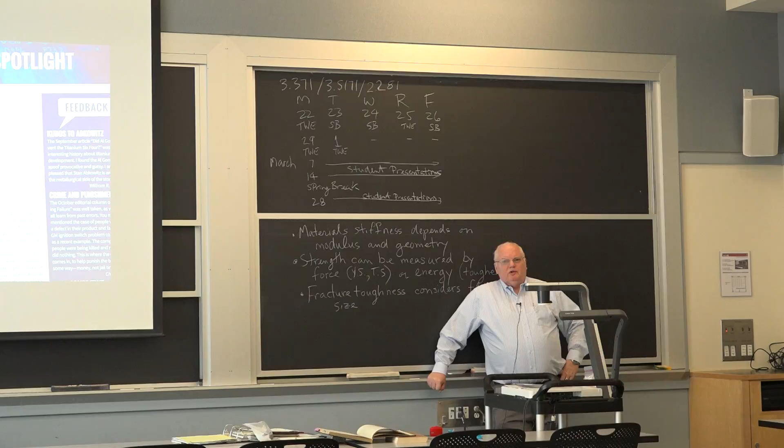Is there a particular time or date you want to exclude? We're going to have the room from 8 o'clock in the morning till 11. I'd be willing to start at 8, but I don't think most students are. I think some students might be willing to start at 8:30 - the 3 of you come early, right? Or the 4 of you, including Paola.

Not that we have to do that, but there are 46 presentations, and if we're going to finish them, we've got about 3 weeks. I want to try to finish them over the 4-week period that includes spring break, so we've got 3 weeks. If we have to, we can go later, but your other classes are going to start getting busy, and some undergraduates have said they want to avoid the week before spring break because that's when other classes have their midterms.

A third of the class are graduate students, and I've got to do some traveling in between here. For example, the 8th, I have to be in South Carolina, I think. I'll find out later today. But anyway.

And then for the one-page summaries of each module, when are those due? Before I have to turn in grades, which is mid-March or mid-May. Actually, the last day of class, which is like May 10th, 11th, or 12th. Can we just email them to you? Yeah, that's fine. So it's okay if we do those after spring break? Oh yeah, I don't have to turn in grades right away. The registrar doesn't know that I accelerate the class.

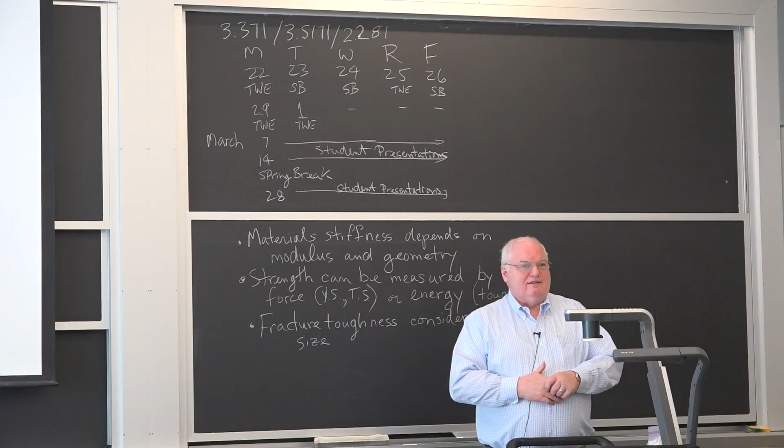To me, it's just as easy to get it done. In fact, the problem I have is if I don't get something off my desk within a week, the odds are I'll continue to say it doesn't need to be done, and it'll never get done - everything else will come in ahead of it. Everybody has their own weakness in how they schedule, and we're all overcommitted. I used to say half of what we do are things we don't really need to do. The problem is knowing which half we don't need to do - I haven't figured that out.

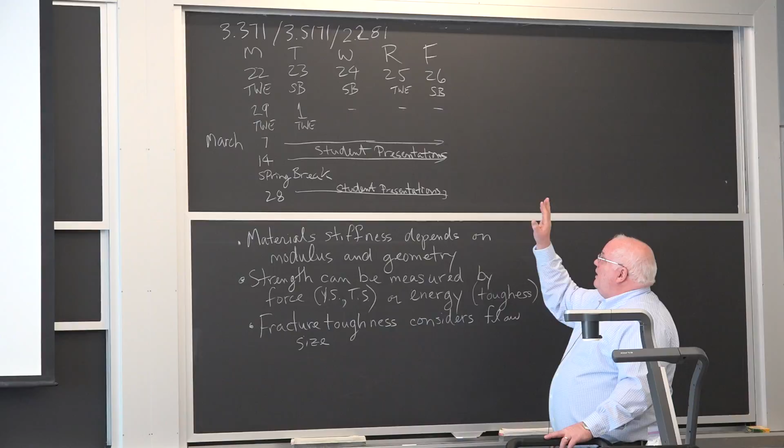Okay, since we've got most of the people here - I'll be lecturing today and Thursday. Dr. Belmar will be in the other 3 days this week. He will finish up his module of 8 lectures this week.

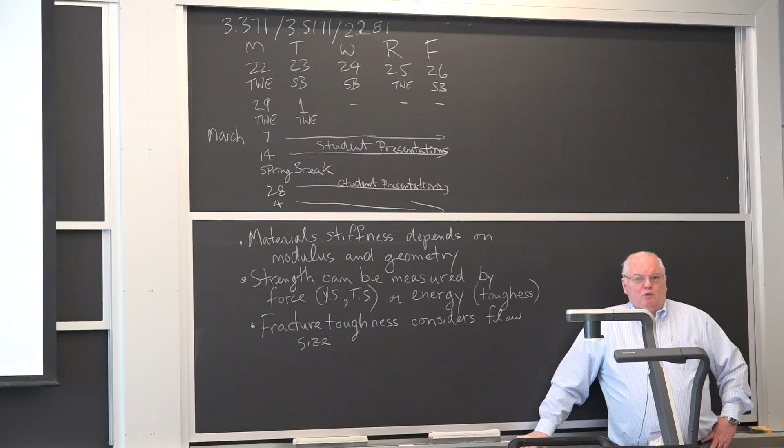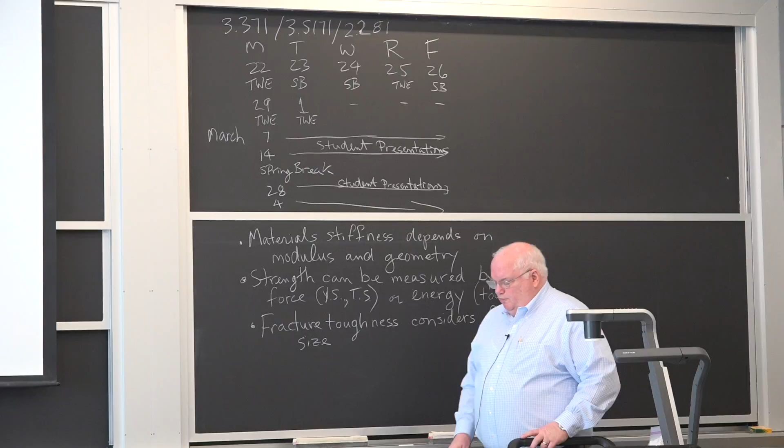Any questions? I did have one little thing I happened to see in a materials journal. I mentioned rare earths, and they said demand's going to reach $4.5 billion by 2019, and it gave a breakdown of where world rare earth demand comes from, talking about 2010 and 2012.

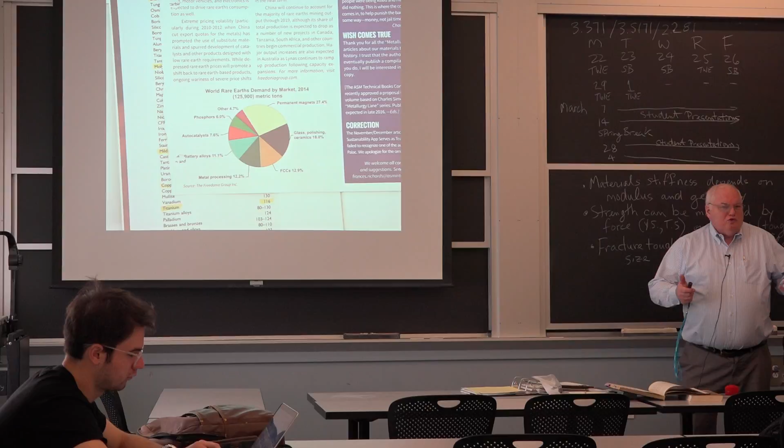China basically decided to cut their export quotas, which meant they refused to sell to Japan. That's a euphemism for political warfare against Japan. So that's one of the externalities.

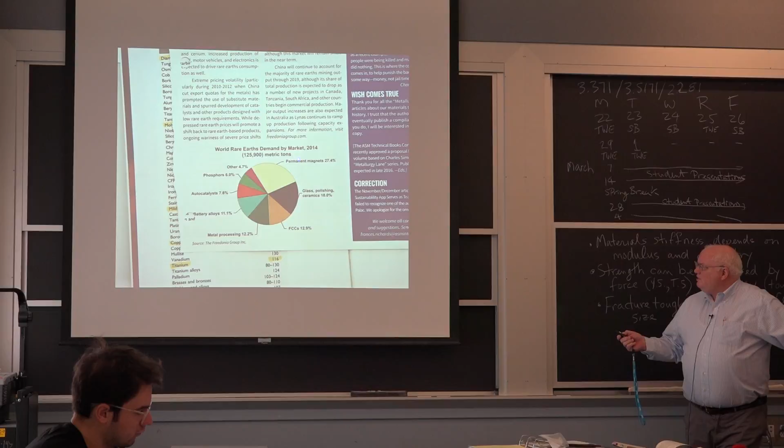125,000 metric tons in 2014 across lots of different areas. Permanent magnets being the largest, a little over a quarter. Polishing of glass and ceramics - it turns out a lot of the rare earth oxides are very hard and make good polishing media. They're not really rare, I think I mentioned that. We call them rare earths, but they're not really rare in the Earth's crust necessarily.

Metal processing turns out to be 12%. People use cerium in steel to tie up the sulfur, and there's 1 billion tons of steel, so it doesn't take very much cerium in steel to end up being a fairly large fraction of the total.

Catalysts, phosphors, a number of uses. Battery alloys - I don't even know what FCCs are.

But to give you an idea, 125,000 metric tons compared to steel, which is 1 billion metric tons - we're talking orders and orders of magnitude larger. And we're talking about a world market of $4.5 billion. What's the market for steel, roughly? It's $750 billion. So $4.5 billion is a drop in the bucket in terms of the size of the industry.

If you were to do the same thing with titanium, we all think of titanium as essential, and it is essential to our aerospace and space sectors. But titanium cannot even afford to have their own rolling mill. Essentially Timet, the world's largest titanium producer, rents one day a month on a steel mill to roll titanium. So they can produce most of the world's titanium on one steel mill, one day a month.

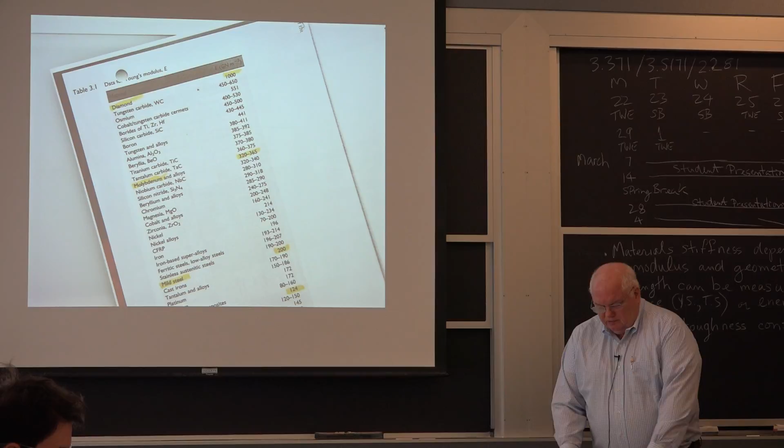You have to understand the difference in magnitude of these things, which is one reason I put it up. We talked about diamond having the highest modulus - in gigapascals, it's 1,000 gigapascals. Tungsten carbide is 450 to 650, depending on how it's put together.

Tungsten in its alloys as an element is 380 to 411, so about 400. Molybdenum is almost as high. Mild steel is way down at 200, one-fifth of diamond, but still pretty high compared to all the other things.

Titanium is only 116, and aluminum is 69 - only 7% of that of diamond. Copper is 124, about the same as titanium. Copper, interestingly, is very crystallographic orientation dependent in terms of modulus.

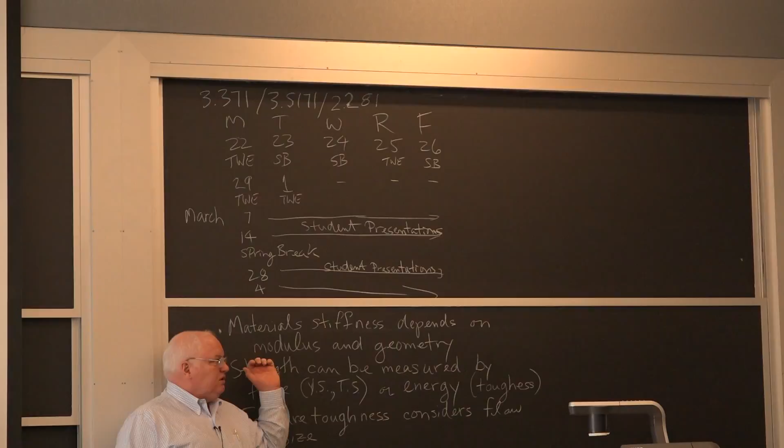One of the things we talked about before was material stiffness. It depends on both the modulus, which is a chemical bonding property of a material, the strength of the chemical bond, and the geometry. We talked about Timoshenko's book on the history of the strength of materials.

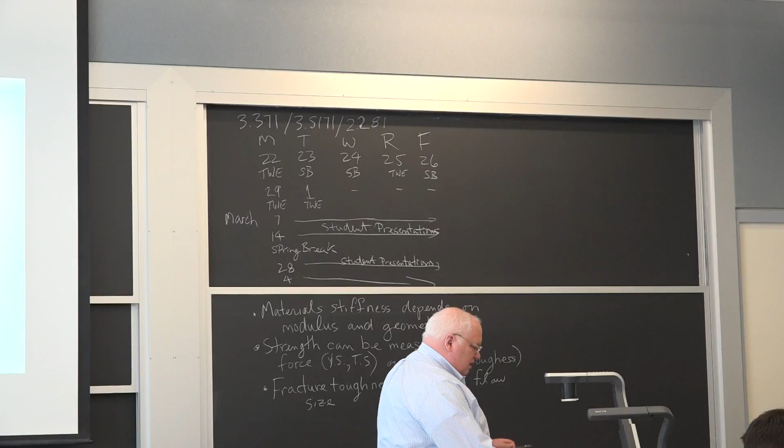Here's good old Timoshenko's text from 1950, and I showed you his picture of Galileo measuring the strength of a beam. This is from one of Galileo's illustrated books. There's a beam, and he hangs a weight on it, and Galileo started to figure out something about the strength of a material.

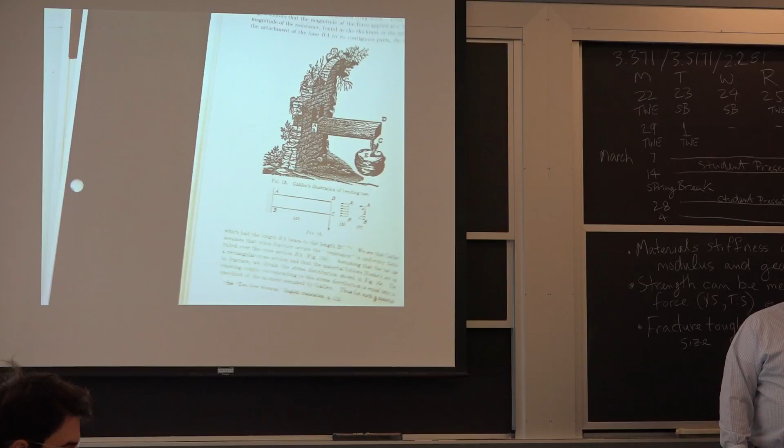There was Hooke's law in the 1660s, which basically said stress was proportional to strain. But this is Hooke right here. Hooke had some drawings from some of his papers trying to figure out the modulus of a material.

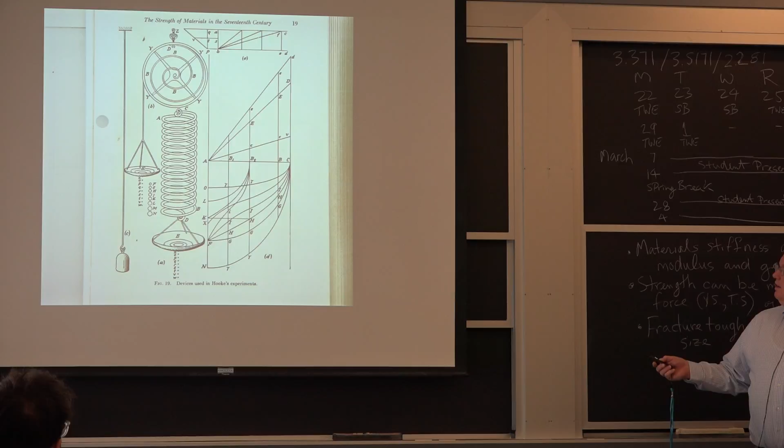In one case, he just took a wire and hung a weight from it. In another case, he took a balance and could weigh something and measure how much it was stretched. In another case, here's geometry: he took the same type of wire and made it into a coil, and you get a lot more deflection. But if you go through the mathematics, it turns out...

Does anyone know what type of stress is on a spring when you extend the spring? It's not a tensile stress. Turns out it's a shear stress, and it's equivalent—if you had straightened the whole thing out—to a twist. So springs actually fail in torsion, even though they're operated in tension, but they're circular, so the stress axis changes.

But anyway, so these are the types of things. Hooke's sitting here trying to figure out the difference between these two things, the material property and the geometric property. It wasn't obvious in the 1650s that there were these two things that changed the stiffness of a material. But it was pretty important whether you were designing cathedrals and big buildings like that or whatever.

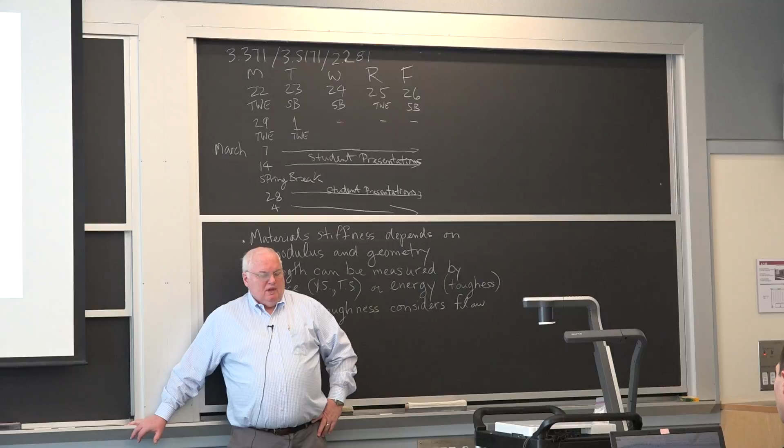We had railroad bridges. The big industry, just like the automotive industry is huge today, the huge transportation industry, aside from whaling and ships, in the 1800s was railroads. And in fact, Andrew Carnegie became the richest man in the world, richer than Bill Gates is today on a constant dollar volume, by selling steel to the railroads. Just like Bill Gates sells software to the computer makers.

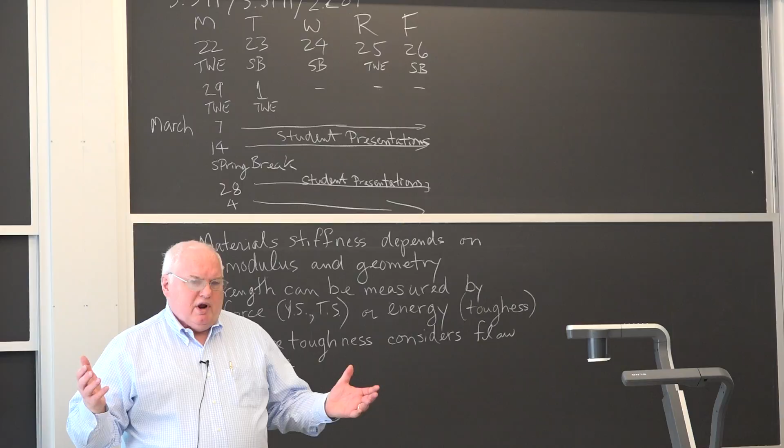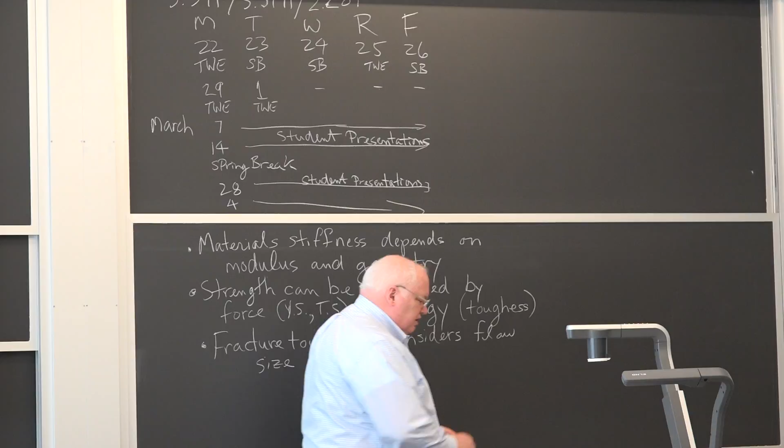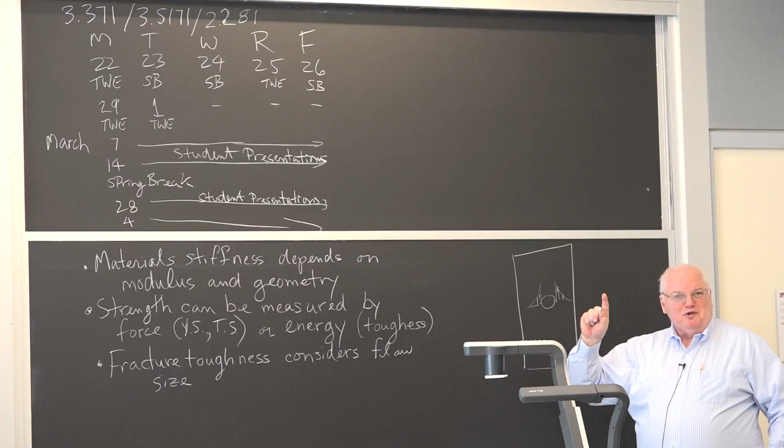Does anybody know what the first calculation of a stress concentration was? There's a hole in a plate, a simple little round hole. And someone calculated from first principles that the stress at the 3 o'clock and 9 o'clock position would be magnified by a factor of what? Come on, some of you know what the stress concentration around a hole is. It's a factor of 3.

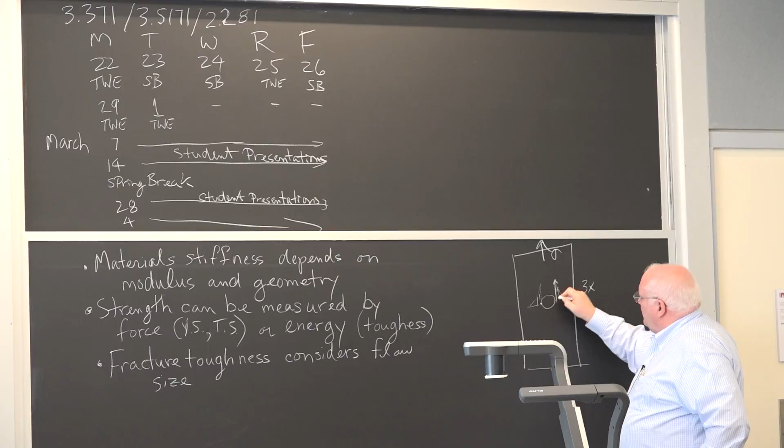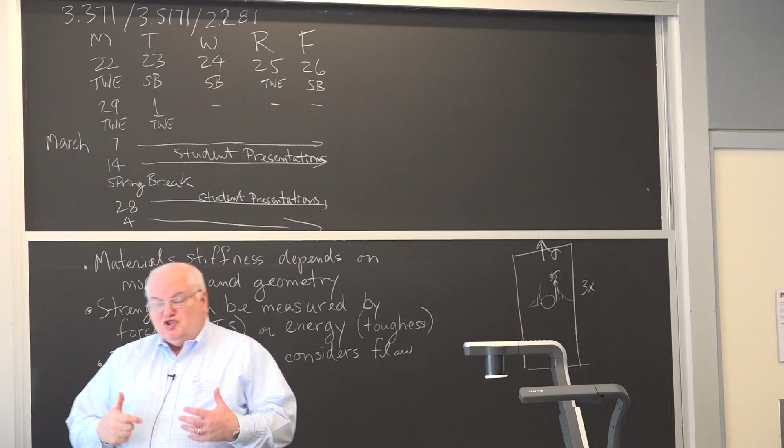So if the nominal stress is sigma right here, at 3 o'clock and 9 o'clock you have 3 sigma, and you can prove that mathematically, okay? The stress concentration as the stress dies off around the hole. And if you have a sharper notch, you can have higher stress concentrations.

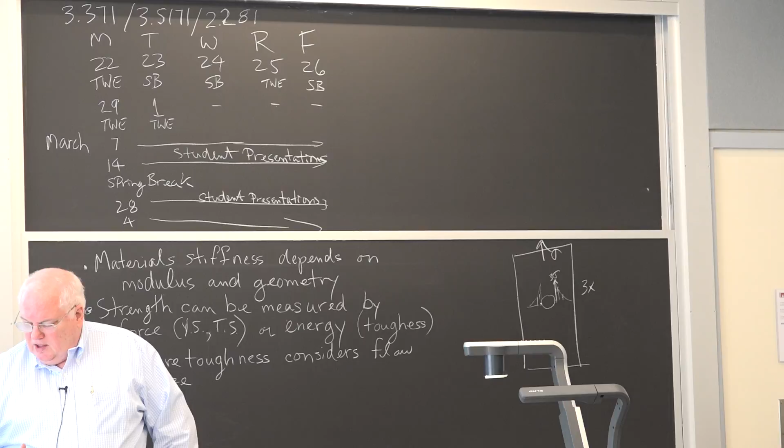So people started learning about stress concentrations, and they started measuring tensile tests, and they knew there was something different about metal that was ductile and metal that was brittle. They didn't know exactly what it was. They could see on the fracture surface that the brittle fractures looked sort of crystalline, and so they would say that the steel crystallized, okay, or the metal crystallized. They could see that even on cast irons and stuff.

And so it wasn't until X-rays came along that they realized all metals were crystalline, and so it wasn't crystallization that was causing the brittleness. But I still see non-technical people now talking about the metal crystallized when they say it got brittle. And that's well over 100 years since we learned that that's not the case. It's not the fact that it's crystalline, it's because it has mobile dislocations.

Does anyone know why metals have mobile dislocations, whereas ceramics and polymers and other things don't have mobile dislocations in the crystal? Nope. Okay.

Well, you know what a dislocation is, right? It's a missing plane of atoms, or a twist if it's a screw dislocation. And if you push on the dislocation, it turns out you can essentially break one row of bonds at a time rather than breaking all the bonds at once.

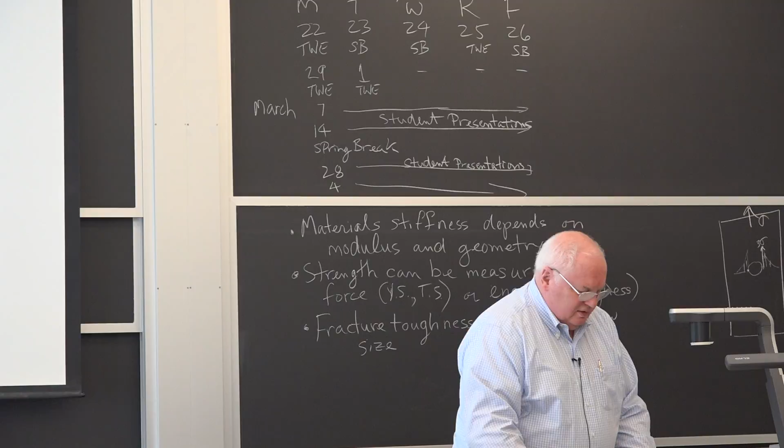If I tried to, I should have brought a telephone book. I used to rip telephone books in two to show students how to do this. Maybe on Thursday I'll remember to do it. But if you take a sheaf of papers, I can do it with this sheaf of papers - it's not very thick. And you just try to pull on it. I told you before, if you pull on the edge, it takes pounds of force. And if you have 1,000 pages, it takes 1,000 pounds of force if it took 1 pound for one page.

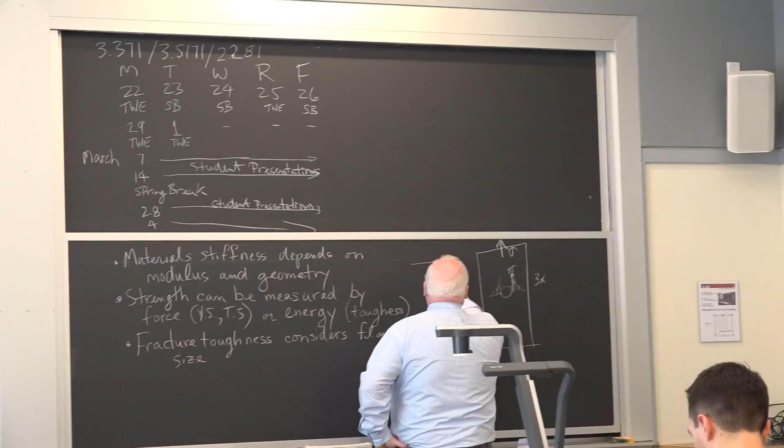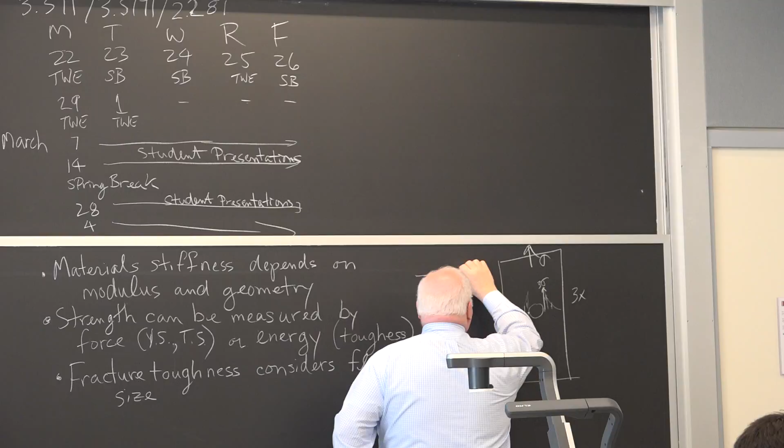Well, if you were to take that page and introduce a dislocation by making a little U in it like this, and then break its back on a thick set of pages, you can break one page at a time because you put one in tension at a time. If you think about the shape of the U - and I've had people complain to me about whether this is a correct analogy - you have pages like this. If you make a U shape in here, and as you bend it back, you'll put the top page in tension, and when that breaks, the next page goes in tension, and it breaks, and you basically rip all the way through.

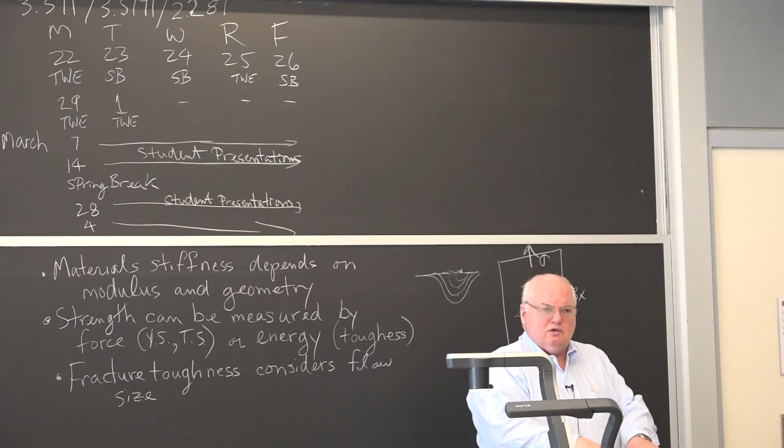So the trick to tearing a phone book in two, and I've done it with the yellow pages before in my youth, is to grab it, make a U, a dislocation in it, and then just bend it, essentially breaking one page at a time. The problem today is that we now polymer reinforce the paper, and I can't even do the MIT phone book anymore, because the paper is actually too strong for me to do it.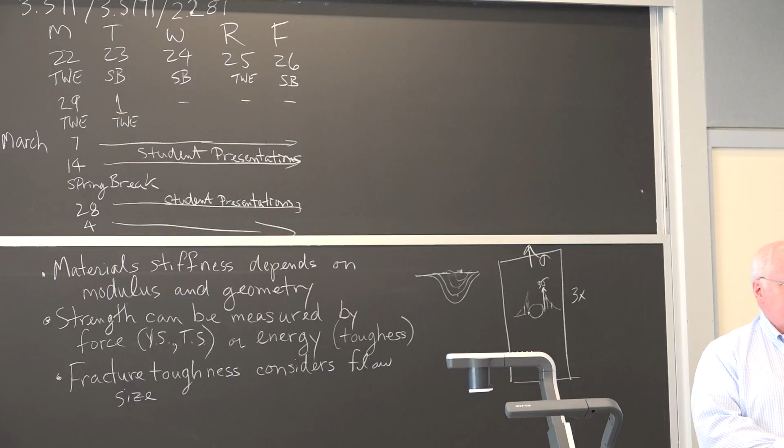Maybe Arnold Schwarzenegger can do it. But in any case, you introduce a dislocation.

People knew that metals, well, with quantum mechanics in the 1920s, they knew the Lennard-Jones potential predicted the strength of pure crystals without imperfections should be like 2 to 3 million psi. They knew the actual strength was 10 times less or more, and they didn't understand why.

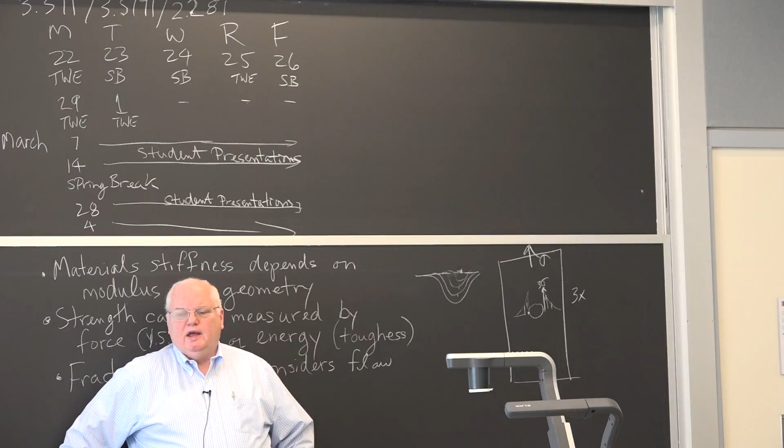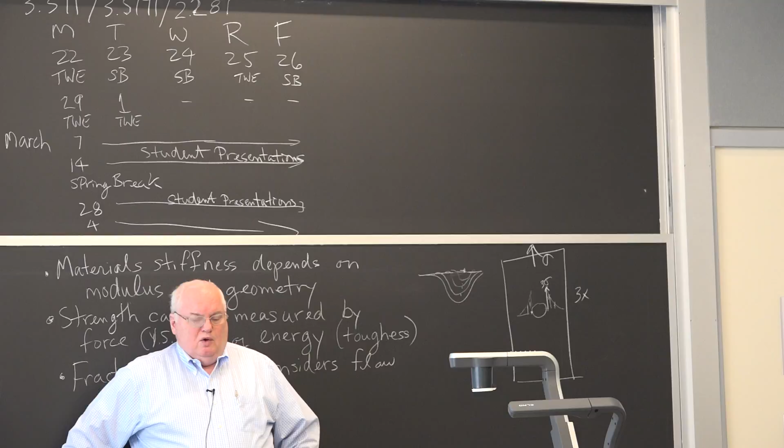And then two people postulated dislocations, Polanyi and Orowan. Orowan was in Hungary, and Polanyi somewhere else in Eastern Europe. Orowan ended up as a professor of mechanical engineering here, but before he came here, he postulated dislocations by looking at the cleaning lady move the rug in his office.

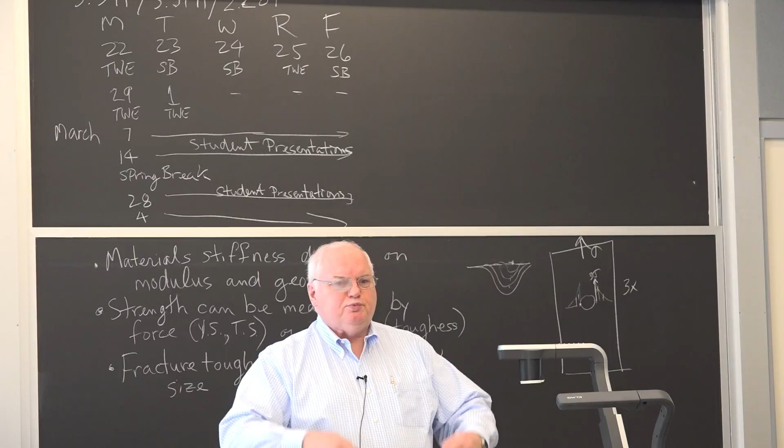In Hungary he had a huge office with a nice big rug on the floor that had gotten out of kilter a little bit. The cleaning woman came in and said, 'Oh, I need to move the rug.' He said, 'Here, let me help you,' because it's a great big rug. She said, 'No, I don't need any help.' She just put a little crease in the rug, a little fold, and kicked it across the room, and the rug moved 3 or 4 inches by the width of that crease.

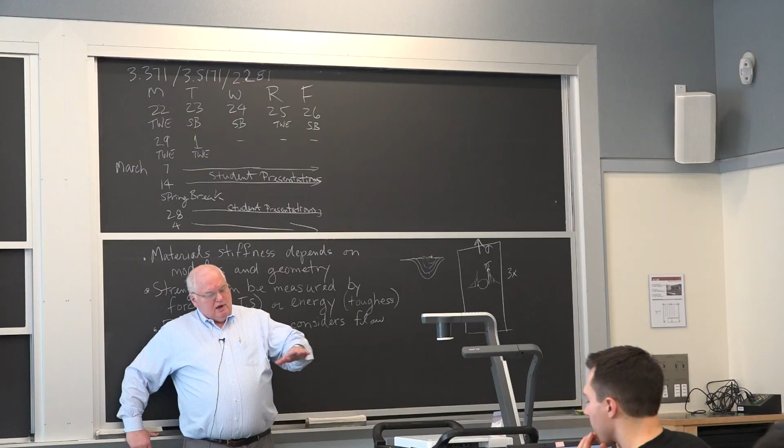Orowan watched this and thought, that's it - that's how dislocations weaken a metal by a factor of 10. A mobile dislocation - and we have mobile dislocations in metals because metal bonds are not directional, not strong directional bonds like covalent bonds. The electrons are very non-localized, so you can have these things break one row at a time, just like that cleaning lady kicked the rug across the floor. So next time someone comes in to clean your office, pay attention to what they're doing.

He never did win the Nobel Prize - he was an engineer, and they don't give Nobel Prizes to engineers. But in any case, people understood that some things were ductile and some things were brittle.

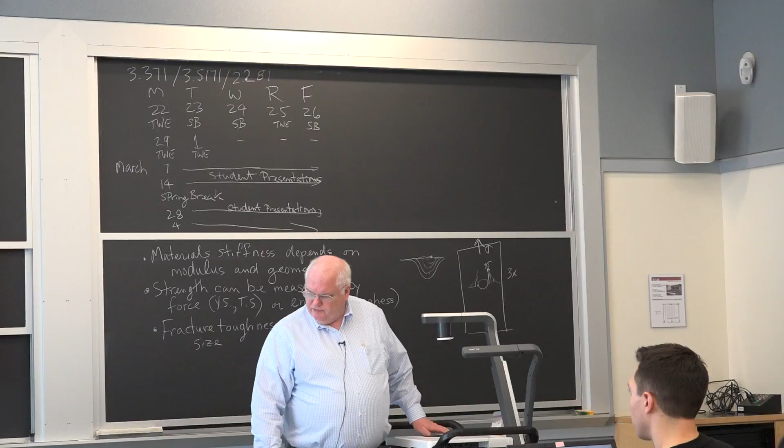The problem with brittle materials is that you cannot predict the fracture behavior. There was this guy Griffith who was trying to understand the brittle fracture of glass, and he realized it was a flaw. I've already shown you with a piece of paper - paper being a brittle material. When you put paper back together after fracturing it, it goes back together just like a coffee cup, with no deformation.

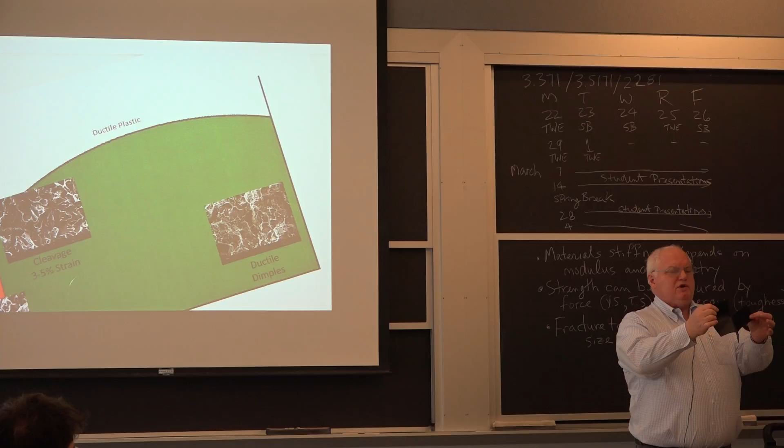Whereas if you take a piece of metal or ductile rubber, the crack tip blunts and it stretches, and when you try to put them back together, they don't fit back together at the end. Here's an old piece of rubber - I wish I could figure out what kind it is. For years I've been tearing it, but this is the toughest rubber I've ever found. I'll have to analyze it someday.

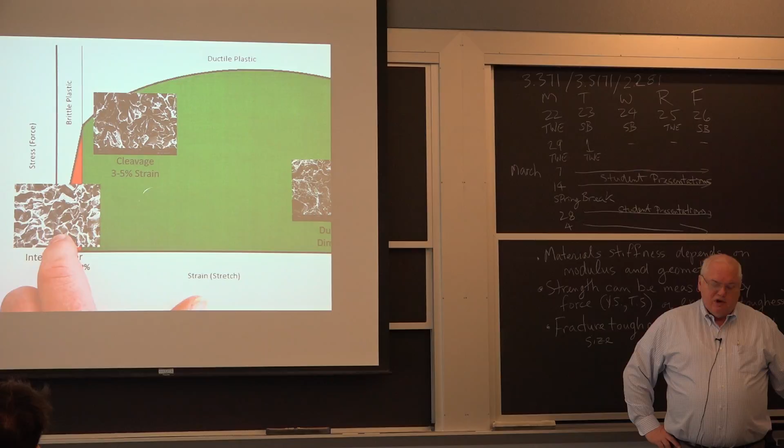This is a plot of the stress-strain curve of a material, made for a different reason. In the elastic region it should be brittle elastic, and ductile plastic. When the material exhibits ductility and has a lot of strain, you absorb a lot of energy there; you don't absorb energy in the elastic region. In the brittle elastic region, it depends on the size of the flaw how much strength you have - that's fracture mechanics explaining the size of the flaw.

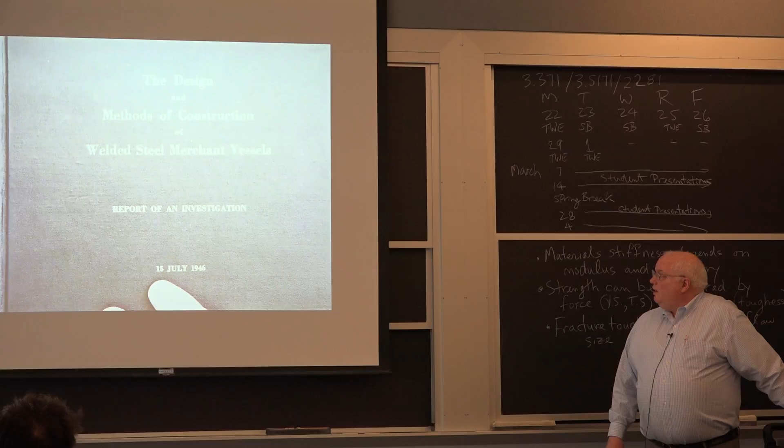Griffith came up with his theory in the 1920s, but we really didn't pay much attention to it until after World War II. We had a number of problems, and this is the 1946 U.S. Navy report on design and methods of construction of welded steel merchant vessels - an investigation the U.S. Navy ran right after World War II.

During the war they built Liberty ships, some from laying the keel to sailing away in 2 weeks at the height of the war - they really learned how to pump them out. They built 4,700 Liberty ships, of which 1,000 suffered casualties involving fractures. 24 vessels sustained a complete fracture of the strength deck, the top deck which gives strength in bending. One vessel sustained a complete fracture of the bottom. 8 vessels were lost, of these 4 broke in two, and 26 lives were lost.

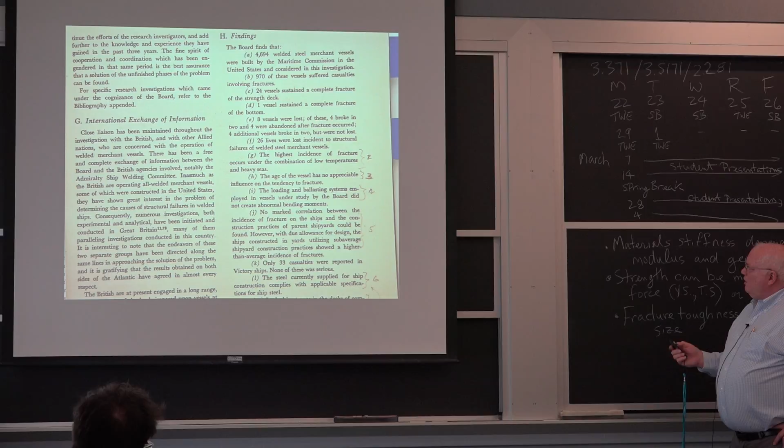Anyway, the famous picture of the SS Schenectady sitting at dry dock - it had never even been out to sea.

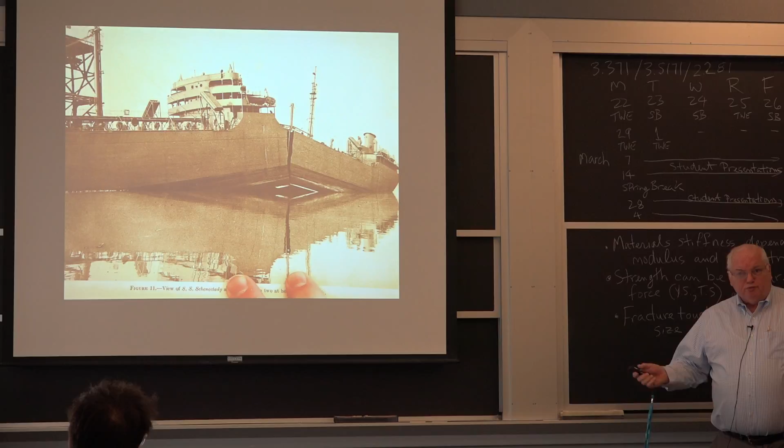It just decided to break one day, okay, as it's sitting at dry dock. If you go to a fracture book, this is the classic picture they usually show. What they don't show is one of the plates from this book of the SS Esso Manhattan, where the same thing happened out in the middle of the ocean.

Which was a lot worse than doing this at dry dock, okay? So they lost a few ships, and they came in and did a study. There were three places where they did big studies of brittle materials after World War II, even though Griffith had explained the brittle fracture of glass, but no one understood why he was studying glass and fracture. Everyone knew it was brittle. But Griffith had explained it was the flaw size, and he came up with the fundamental equation of fracture mechanics.

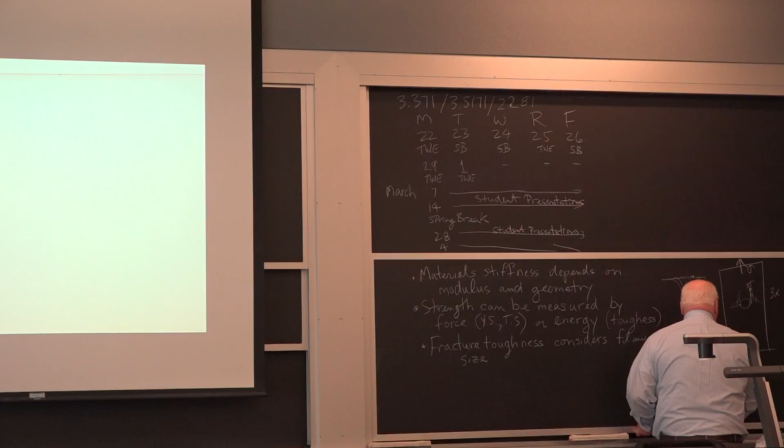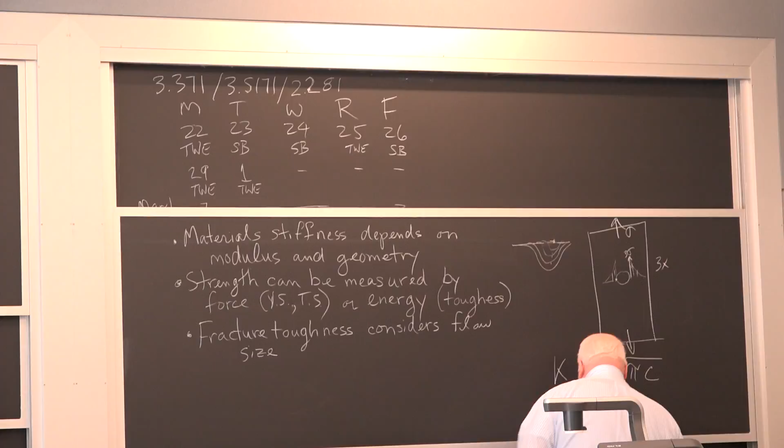Which I wrote down the other day, that the toughness of the material must be greater than the applied stress times the square root of pi times the crack length, okay? If this is a specimen, a typical fracture toughness specimen, it looks something like this, has some holes in it so we can grab it, and C is the crack length, okay, and you have a crack right here.

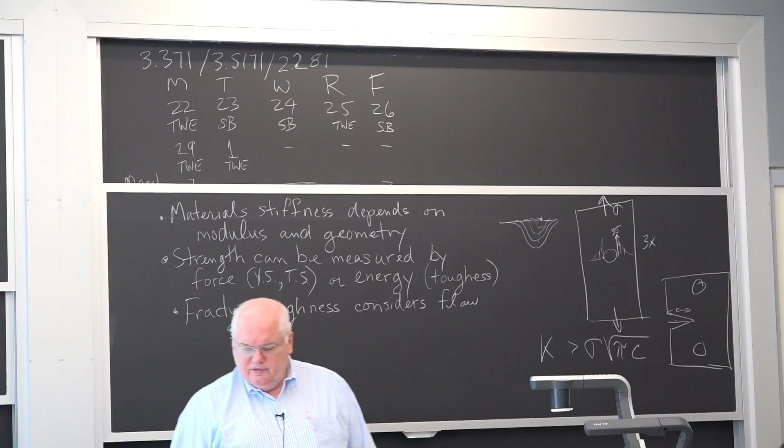I will show you. This is a fracture toughness specimen made out of granite. This was part of Wendell W. Wilkening's doctoral thesis. He was finishing up his doctoral thesis here when I started, the week I was starting as an assistant professor. And Wink, we call him Wink, was studying the fracture of granite.

Because Professor Backofen, who had taught me mechanics when I was a sophomore, was curious about how they raised the Egyptian obelisk, you know, these things that look like the Washington Monument. And everyone had assumed they built it, they cut the stone in the horizontal position, it's all one stone, and they just lifted it up, okay?

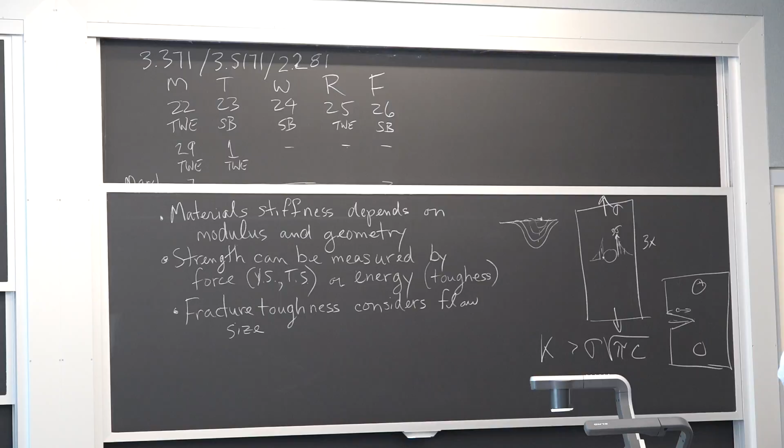But if you did the fracture mechanics that people understood in 1970, it should have broken under its own weight, such a brittle material. As you lifted it up, it should have fractured. So he put Wendell on a doctoral thesis to try to understand the brittle fracture of stone.

And he found out, well, they already knew granite is a three-phase material. You can see white, black, and gray—three different crystal structures of three different minerals in granite. And what he found is that at the tip of the crack, you actually get little micro cracks. And those micro cracks absorb more energy than anyone ever thought they would in terms of fracture behavior of things. And that's why the Egyptians were able to raise that obelisk up.

There was more fracture toughness. You could postulate some flaw size, you can calculate the stress, you can estimate the fracture toughness, but the dynamic fracture toughness was greater than they had assumed. You only have three parameters here: applied stress, toughness of the material, and size of the flaw. And that's the science of fracture mechanics. Now there's lots of different mathematics that goes with it and whatnot, but fracture mechanics could explain these things.

After that, a number of ceramists started saying, oh, all we have to do to toughen ceramics, which are terribly brittle, is introduce other phases that will cause these little cracks. And that's true for the first loading. What happens on the second loading after you've already introduced those little cracks? You can't crack them again, okay? And some of that led to the ceramics fever of the 1980s.

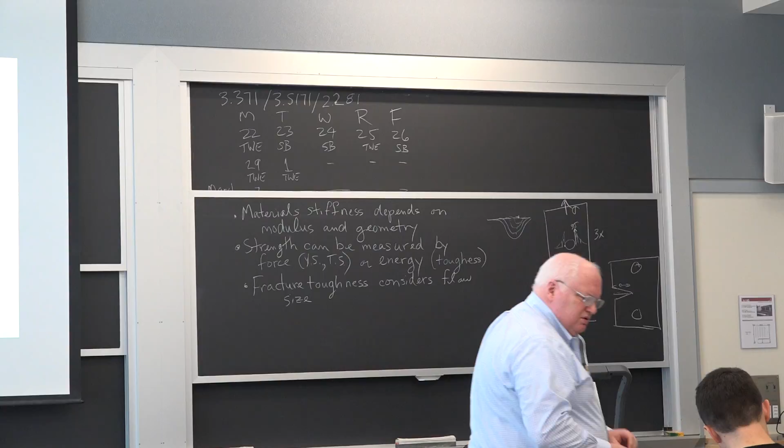If you look on the fracture surface here, you'll see a little shear lip - at least on one of the brittle fractures you should see a shear lip. Not very big for shear lips on these. There's a little one here, a little 45-degree slant, which was the compression side of the fracture. There was enough stored energy that even though one of them broke, the other was close enough to breaking.

We still run into brittle fracture today, okay, in all kinds of structures.

Actually, I'll do this one. Well, I won't do this one yet. This was one I had a few years ago.

When they started making a lot of ethanol about 10 or 15 years ago to put into gasoline - the 10% ethanol in gasoline - using most of our corn crop to do that, you can talk about the politics of whether that made any sense. It turns out to make the corn syrup, to make the ethanol, you have to crunch up all the corn stalks and corn and stuff, and then you end up having to separate the liquid from the solid.

And to do that, they do this in a big centrifuge. The centrifuge is just a big spinning disc, about a 3-ton disc of stainless steel, and it's got some holes in it. So as it spins, you put the silage inside this thing - wet silage - and you're trying to get the corn sugar liquid out of this thing so you can turn it into ethanol to make a substitute for gasoline.

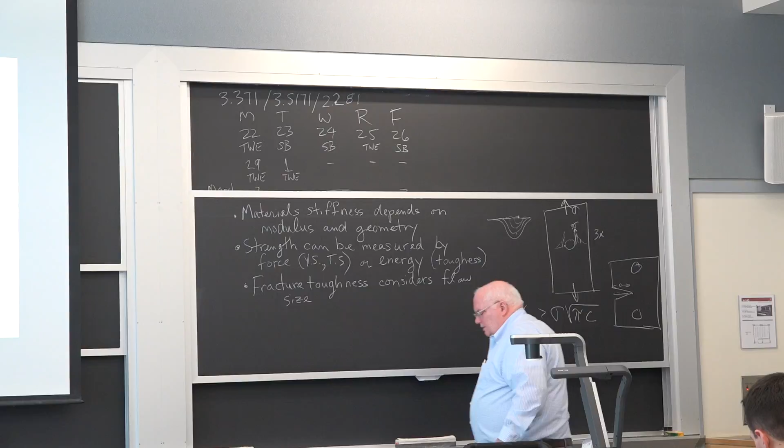And anyway, so we had to figure out - well, I didn't have to figure out why it happened, anybody knew why it happened once you look at how brittle the fracture surface was. And you had that much energy - spinning 3 tons at 1,000 RPM is a lot of angular momentum.

But we had 700 of these around the world, and the question was, how do you inspect them? It turns out the critical flaw size for that was no more than 2 millimeters in size. If you measure the toughness of that improperly heat-treated steel, and calculate what size flaw, just like a small flaw in glass, will cause you to lose all your strength, in this case it's less than a 2 millimeter flaw in one of these drilled holes. You had fatigue cracks forming at the drilled holes because of a stress concentration from a hole, and you had to inspect this thing. It was about 10 inches deep, only a 1/2-inch hole, but about 10 inches deep. How do you get in there to inspect it?

Either that, or you just quit making ethanol, and people quit driving their cars, or whatever.

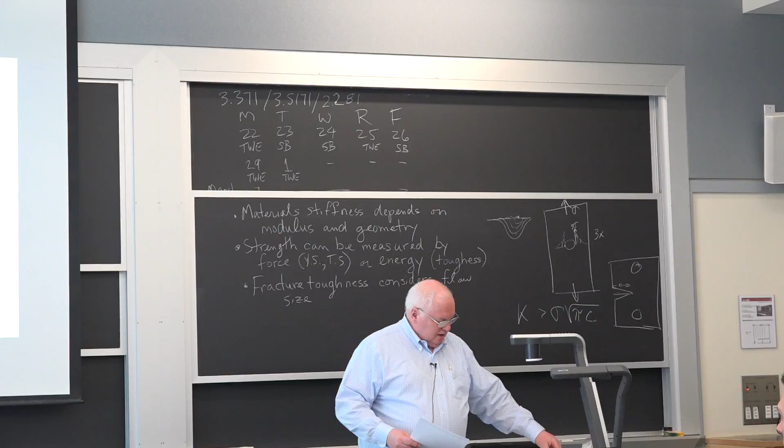But we still have problems with brittle fracture. Now it turns out Pellini, the guy at the Naval Research Laboratory, developed something called ratio analysis diagrams for steel, titanium, and aluminum. I'll show you one of these. This comes out of the ASM handbook on fatigue and fracture.

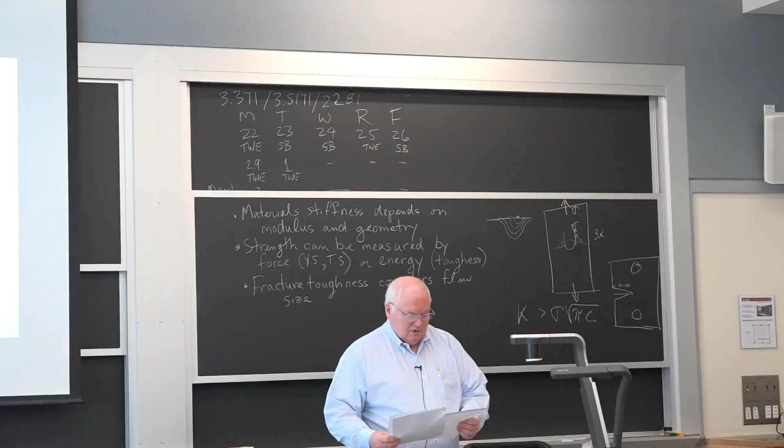Oops, yeah, here it is. By the way, before I show you that ratio analysis diagram, let me show you some of the specimens.

If you go back to a book by a couple of guys at U.S. Steel from the 1960s when they started doing fracture toughness specimens - I passed around that little piece of granite, that's the fracture toughness specimen. These are fracture toughness specimens, called compact tension specimens. There's the holes that you grab the thing with in a great big machine. Here's a little one, actually probably larger than my granite one, and you get bigger and bigger until here's one sitting on a couple of 4x4s here in the lab - this one weighs tons, okay? Turns out you need to know how thick your steel is in order to measure the fracture toughness of the steel, and we'll go over some of that in a little bit.

But Pellini, basically, was taking a very practical approach. He was working for the U.S. Navy, and he wanted to know what kind of steels, the properties of the steels were, because they were going to build nuclear submarines back in the 1950s. He came up with something he called the dynamic tear energy, similar to a great big Charpy bar with a little notch in it that you hit with a hammer, versus the yield strength of the steel in KSI. This is a ratio analysis diagram, RAD, for steels, that he put together from lots of different things.

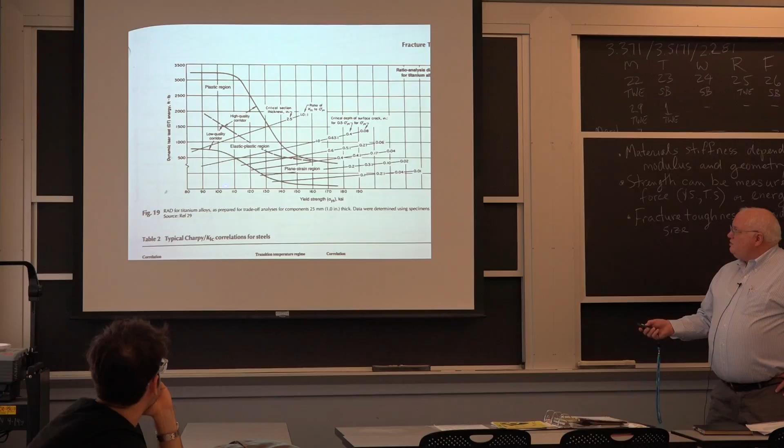And there's a similar plot, because the Navy at one time was interested in titanium submarines, which they're no longer interested in. The Soviets built one, actually built several. But anyway, here's the titanium alloys ratio analysis diagram. Doesn't go out to 300, it goes out to 170, and it has the same general plot - plastic region, elastic plastic, plane strain.

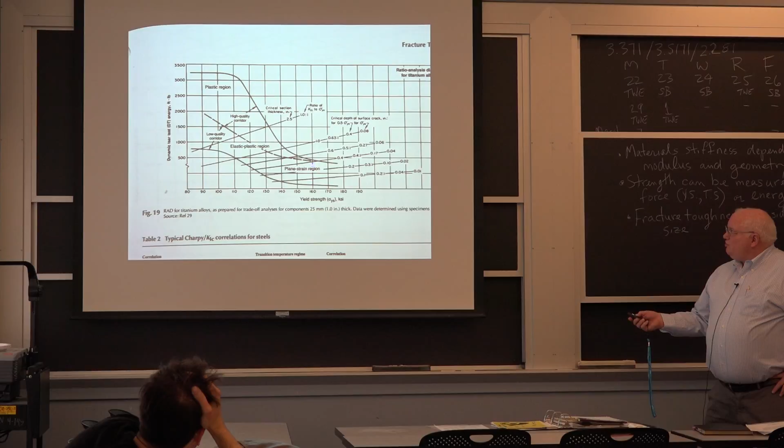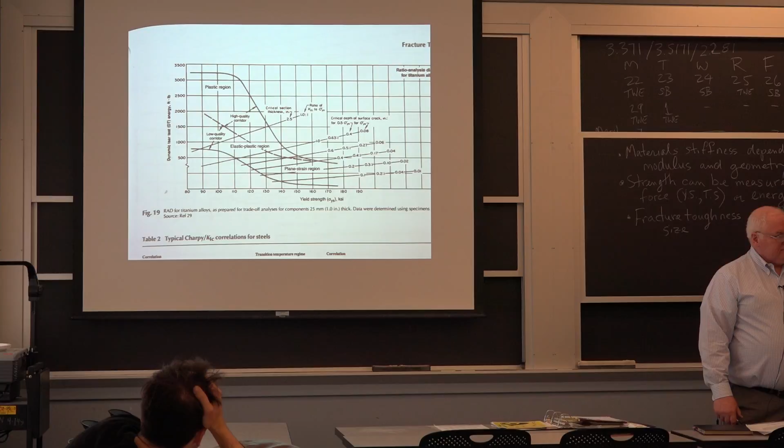Again, in the plane strain region, you're talking about millimeter, half millimeter flaws that could cause the whole thing to fail. So you can go to very high strength metals, but they're starting to act a little bit more like ceramics, so far as that goes. So you're giving up something in terms of the ratio analysis diagram.

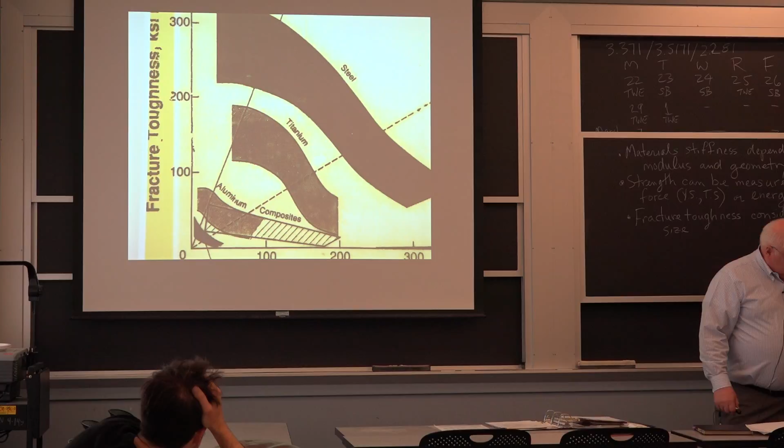It turns out, I've never seen anyone else do this - I plotted all these different materials on one graph once. Some people probably think there's something wrong with doing this: fracture toughness versus yield strength. The steels are up here, titanium's here, aluminum's here, composites are here, plastics are down here, and ceramics - where are ceramics?

Well, ceramics have tremendous strength but lousy toughness. And so ceramics can go out to very, very high strength, but toughness is where flaws a thousandth of an inch in diameter can destroy a ceramic.

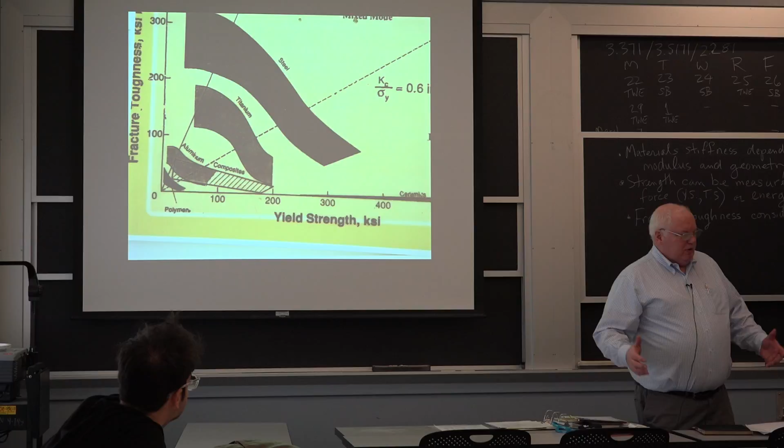And the thing is, you can't inspect things down less than a millimeter in size in general. And so you have no way of knowing whether your structure is going to catastrophically fail on you. You just have to hope that it won't. And a lot of people aren't willing to risk their life on hope. So, any questions on why fracture toughness is important?

So I'll now give you an example, a practical example. A guy who's a graduate of mechanical engineering here at MIT brought this to me. He works for Navtec. Now, Navtec is a company that makes high-end marine hardware for like America's Cup yachts. And it turns out this was a cylinder of high-strength aluminum that they had designed for an America's Cup yacht, and it had 7,500 psi hydraulic fluid in it.

And it's got a wall thickness of about 2.5 millimeters or so. I don't know if we can still see it, this thing's getting a little old. But you have to be able to read a fracture surface. The fracture didn't go all the way through.

The initial fatigue crack - this thing did fail in fatigue. If you can read a fracture surface, you'll see kind of lines radiating that way, some other lines radiating this way. The initial fatigue crack is there at the origin, and it ran about two-thirds of the way through before the thing blew up. And if you're standing right next to one of these things, trying to raise the sails on your America's Cup yacht, and this thing blows up in your face, it's not a good day.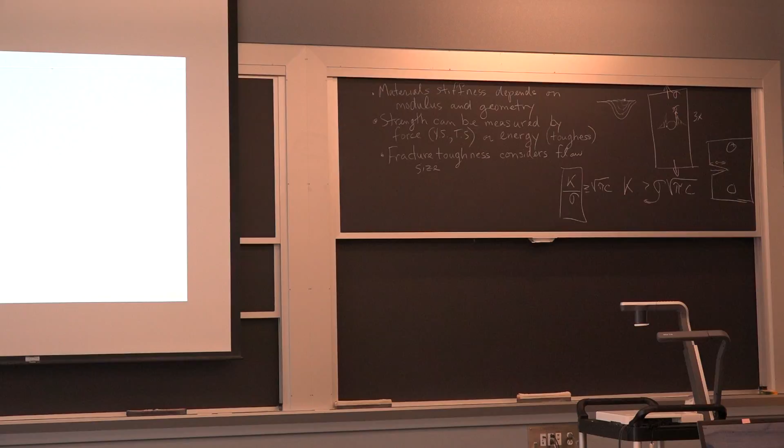At 7,500 psi hydraulic fluid, you can inject the oil right into your skin and your bloodstream, and it does all kinds of bad things when you start putting oil in your bloodstream. You end up with hands that die because they get no blood, okay, and stuff.

So he came in. It turns out on an America's Cup yacht, weight is so critical that they design things to fail periodically. If it doesn't fail periodically, you made it too strong - it's too heavy. That's the design philosophy.

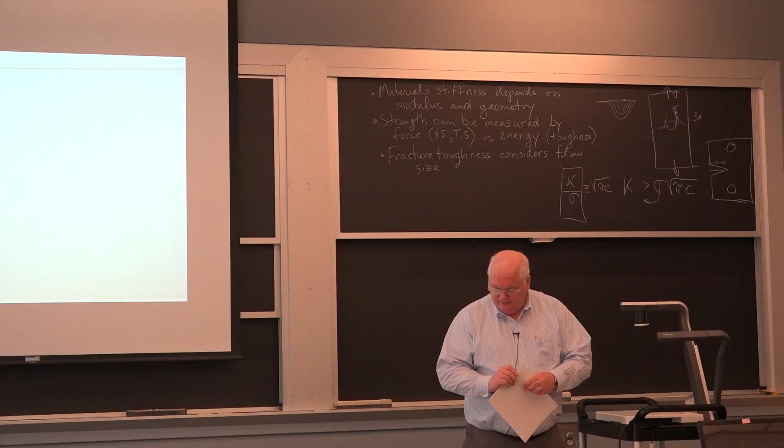Except you don't want it to fail unsafe, you want it to fail safe. And so what they did - well, this was failing unsafe, I mean, it was exploding. And so what they wanted was a leak before break, is what it's called in the literature.

A leak before break means that if this is the wall of your fracture, you want the little fatigue crack to grow all the way through before it gets to critical size, so you get a weeping leak rather than an explosion and the whole thing shattering. It doesn't matter whether it's a little hydraulic thing like this or a great big pressure vessel. We want things to leak before break.

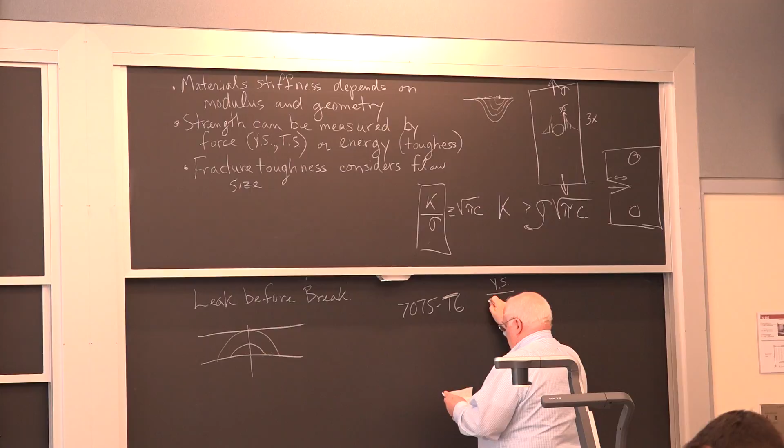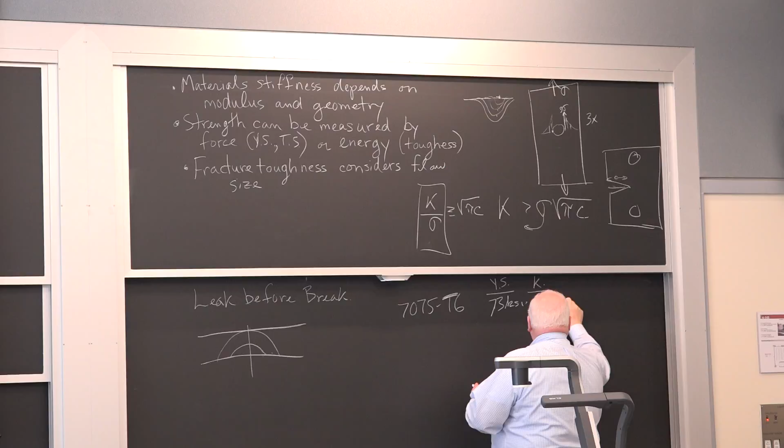So here's what he had. That piece of aluminum tubing was 7075 T6 heat treatment, so it's heat treated to the T6 condition. It turns out, if you look in the literature, the yield strength of that material is 73 KSI. The fracture toughness is 26 KSI square root of inch. And the wall was 1/8 of an inch thick, 3 millimeters.

So this guy calls me up, and he was all concerned. It was a big rush. So I said, well, you can come by Saturday morning. He came by my house Saturday morning, brings me that, and says, we had one of these fail during training, and we can't have that. We don't want to make things heavier. He explained to me the philosophy in America's Cup hardware is if it doesn't fail periodically, you made it too heavy, okay? But you want it to fail safe.

So I said, well, what you need is leak before break. The problem is you were going for maximum strength by giving it the T6 heat treatment. T6 heat treatment aluminum optimizes the strength. What you wanted is the T73 heat treatment. The T7 heat treatment basically overages and you lose some strength, but you gain toughness.

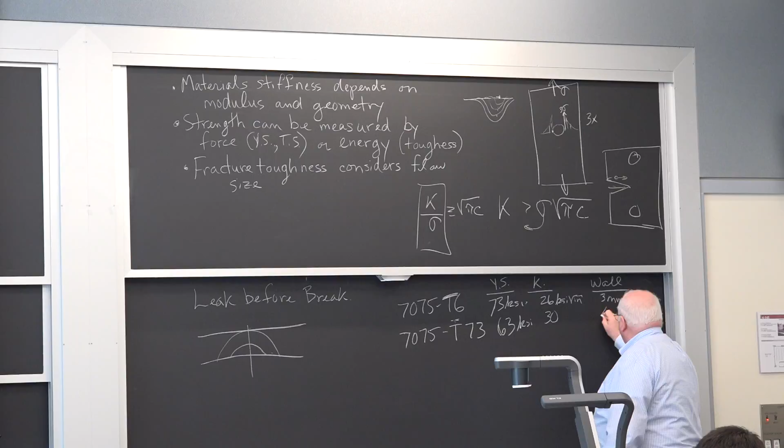So this drops to 63 KSI, and the toughness is 30 KSI, and the critical flaw size for this is 4 millimeters. You drop strength, but you increase toughness, and now the T73 would be leak before break, and it would fail safe by just a weeping leak as opposed to blowing up in someone's hand. Fairly simple heat treatment change, well-known heat treatment, improvement in toughness, loss of strength, but great improvement in safety.

And so he said, oh thanks, how can I pay you for this? And I said, let me have the sample. And that's what I got, I got paid by having the sample. Unfortunately, you could see the fracture when it was brand new, but that was probably 10 or 12, maybe 15 years ago, and over time it's oxidized away and you don't see the contrast. But if you got it in a microscope, you would still be able to see it.

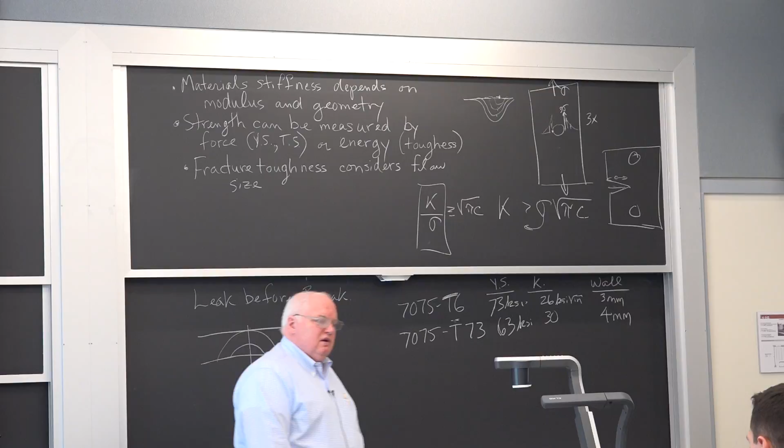So design with structural materials is a balance between strength of fracture by force and strength of fracture by energy. And you need both. It wasn't until the Liberty ships of World War II that we learned you had to have toughness as well as strength. You couldn't just go for high strength.

We use baseball bats now, okay? Highest strength aluminum, up there around 100 KSI strength, off the chart of the ratio analysis diagram that Pellini put together in the 1970s. Today we've got aluminum alloys, we can make them super strong, and we make them into bats, which are very thin wall, and they typically will crack.

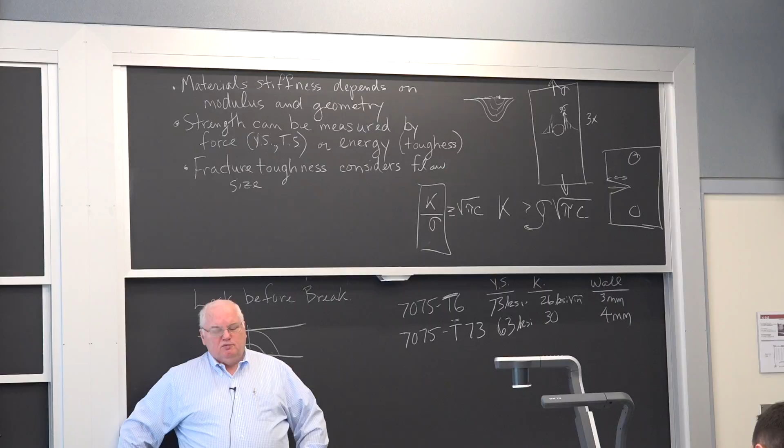They won't work very well as a bat, and they don't shatter in someone's hands, but they cost you another $300 to buy a new bat. And the bat companies think that's fantastic, okay? They last for, I mean they could make these things last for 1 or 2 hits, okay? But people would really get upset if it failed after 1 or 2 hits. But it doesn't matter, they still make them, so it takes 100 to 150 hits before you'll start developing cracks and have to buy a new bat. And they think that's fantastic, okay?

But that's just a difference in philosophy. And it also proves what I said before, people in sports will pay anything to get a competition over other people in sports. Usually it's golfers, but in this case it's parents who want Johnny or Susie to hit a home run and beat, not so Johnny or Susie can rub their friends' noses in it, but so the parents can rub the other parents' noses in it, right? It's sort of insane, okay, but that's what we do. We'll pay a lot of money for sports equipment.

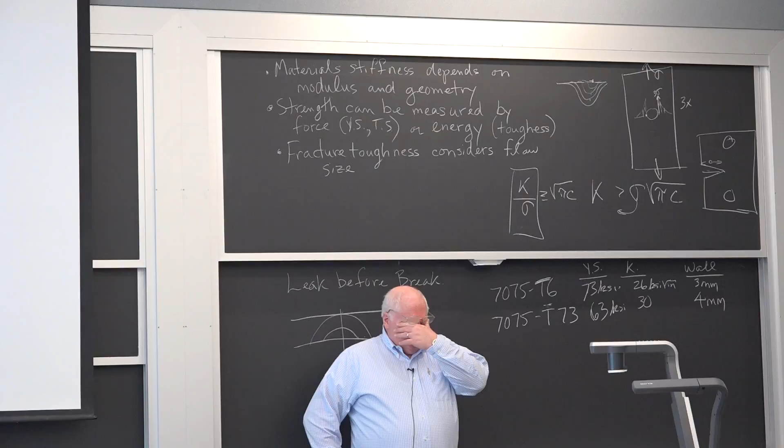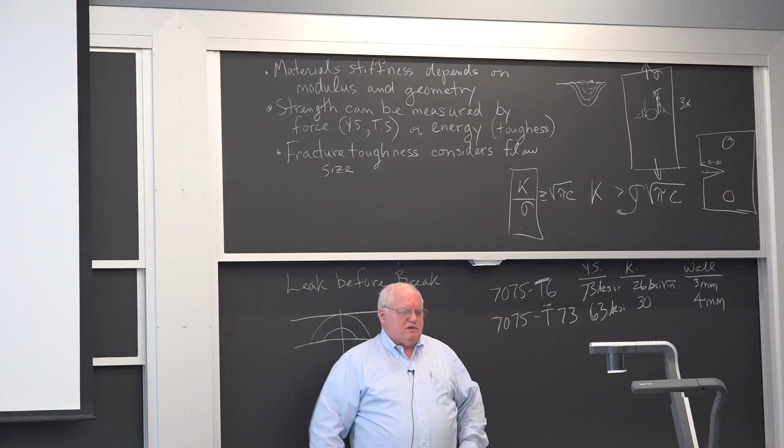Okay, so that's it for today. I'll see you on Thursday, and we'll talk. I think we've covered most of the fracture mechanics stuff. I have lots of stories, I could teach a whole class on fracture mechanics, a 12-lecture module. But we'll start talking about steel and where it lies with regard to other things, at the outer limits of toughness and things like that, and that's why we use so much of it, among the reasons. Okay, thanks.